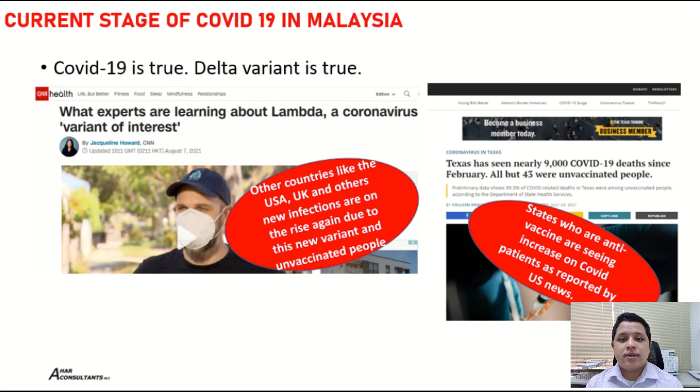As you are aware, COVID-19 is real, the Delta variant is real, and the Lambda variant is coming. In other countries, like the US or the UK, new infections are on the rise due to this new variant. And states who are anti-vaccine are seeing an increase in COVID-19 patients, as reported by US News. Despite the vaccination efforts, we have to live with the virus in the near future.

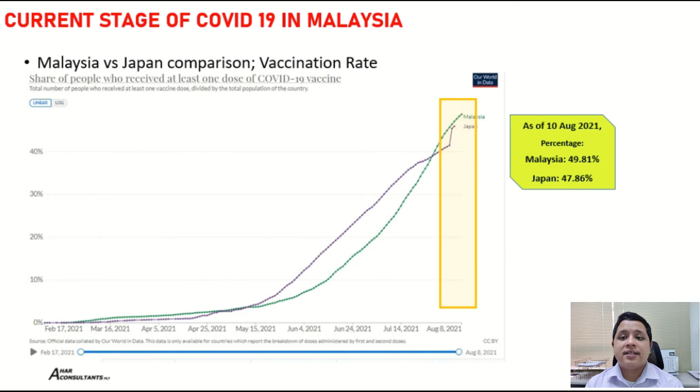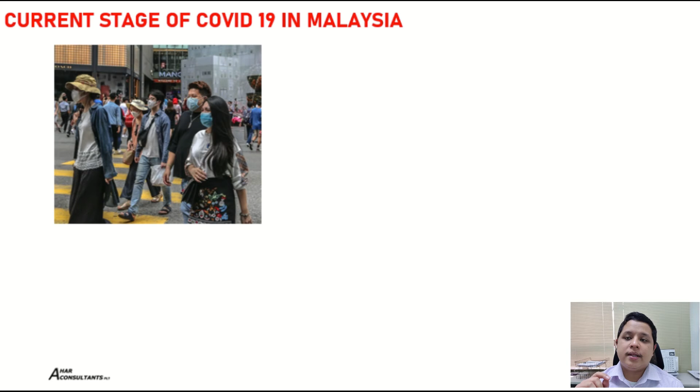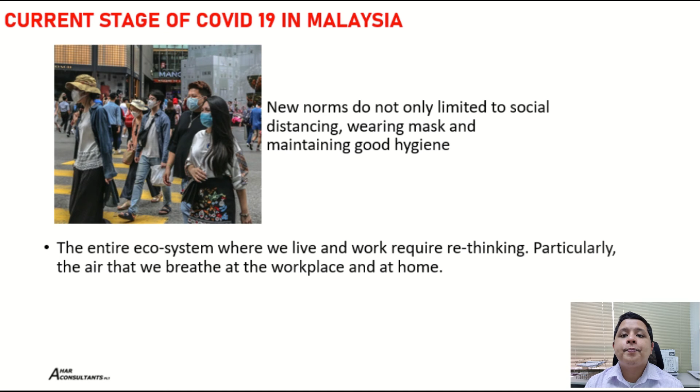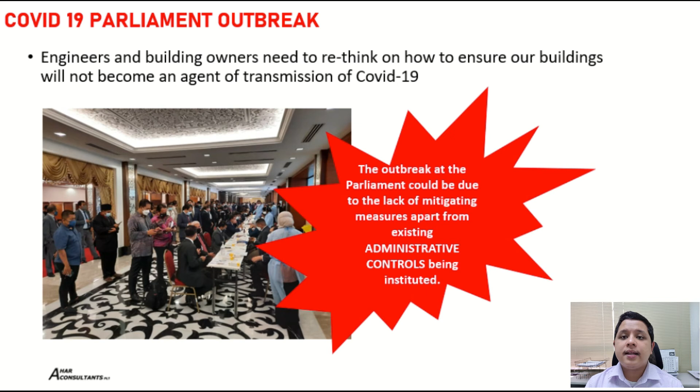New normals are not only limited to social distancing, wearing face masks, and maintaining good hygiene. The entire ecosystem where we live and work requires rethinking, particularly the air that we breathe in the workplace and at home. Engineers and building owners need to rethink how to ensure our buildings will not become an agent of transmission for COVID-19. The outbreak at Parliament could be due to a lack of mitigating measures apart from the existing administrative controls being instituted.

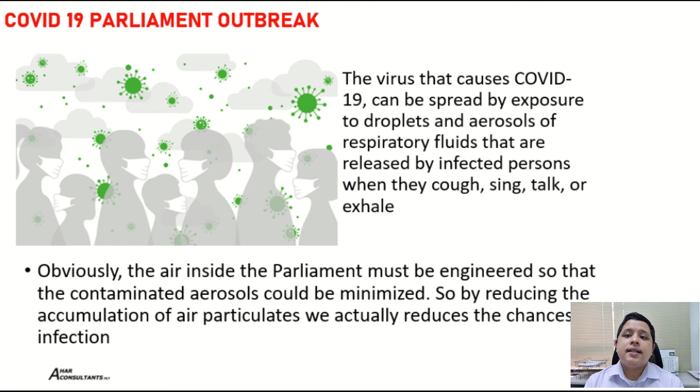The virus that causes COVID-19 can spread by exposure to droplets and aerosols of respiratory fluids that are released by infected persons when they cough, sing, talk, or exhale. Obviously, the air inside Parliament must be engineered so that the contaminated aerosols could be minimized. So by reducing the accumulation of air particulates, we actually reduce the chance of infections.

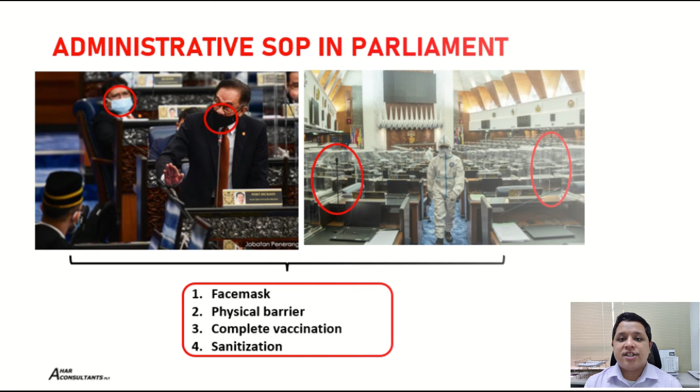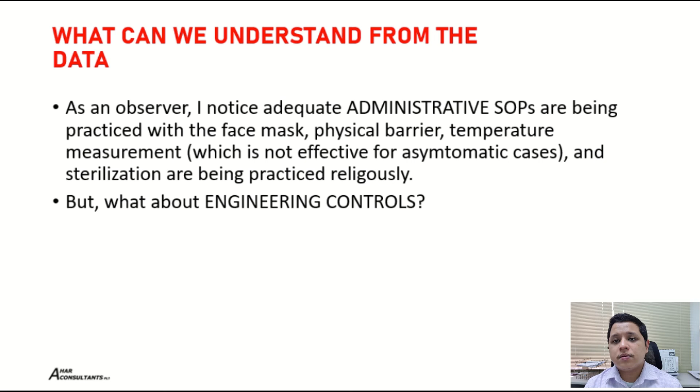Here are some administrative SOPs that I, as an observer, noticed during the parliamentary session. There are practices such as the use of face masks, physical barriers, temperature measurement, which in actual fact is not very effective for asymptomatic cases, by the way, and sterilization being practiced religiously in Parliament. But what about engineering controls? Many studies have shown that these controls can reduce the infection probability. There are 7 main engineering controls that can be initiated.

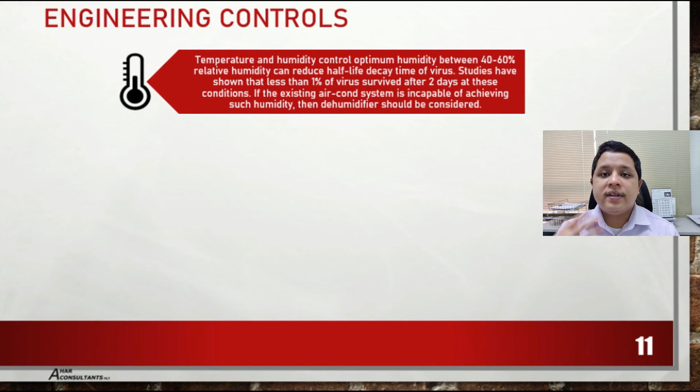The first one is temperature and humidity control. Optimum humidity between 40 and 60% relative humidity can reduce the half-life decay of viruses. Studies have shown that less than 1% of the virus survives after 2 days at these conditions. If the existing air conditioning system is incapable of achieving such humidity, then a dehumidifier should be considered.

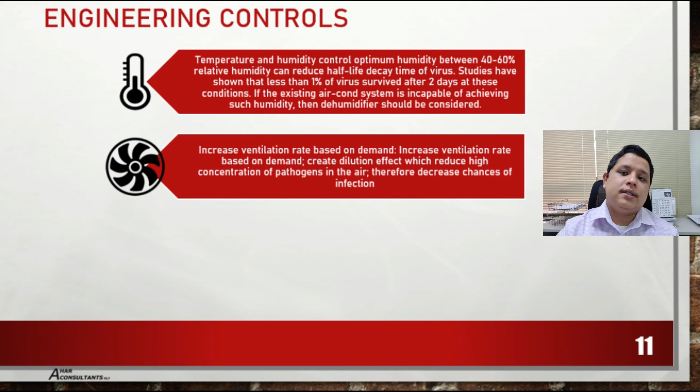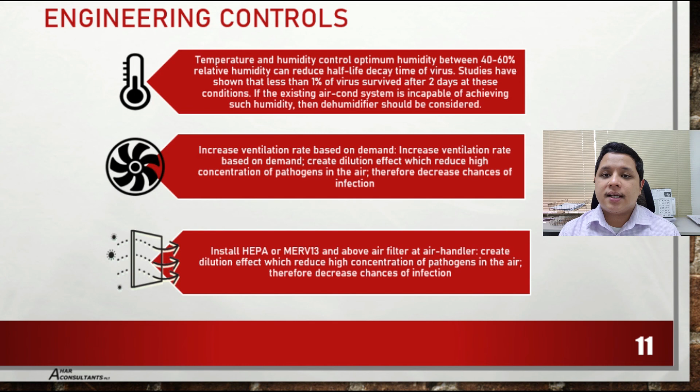Next, increased ventilation rate based on demand. This creates a dilution effect which reduces high concentrations of pathogens in the air, therefore decreasing the chance of infection. Number 3, we have installation of HEPA or MERV 13 air filters at air handlers. This is to eliminate the aerosols from the airstream. The ventilation system can be supplemented with portable high efficiency particulate air cleaners to reduce the number of infectious particles in the air and provide enhanced protection from transmission between persons.

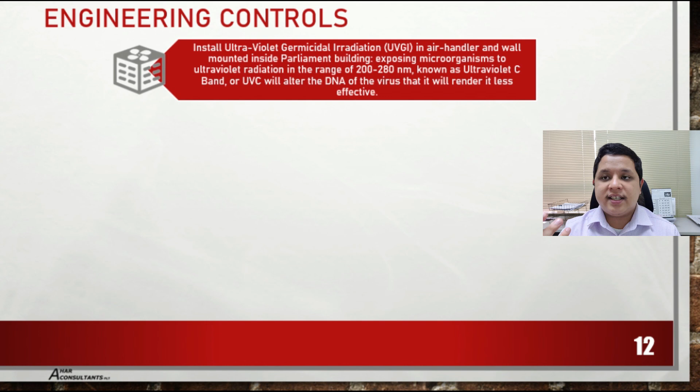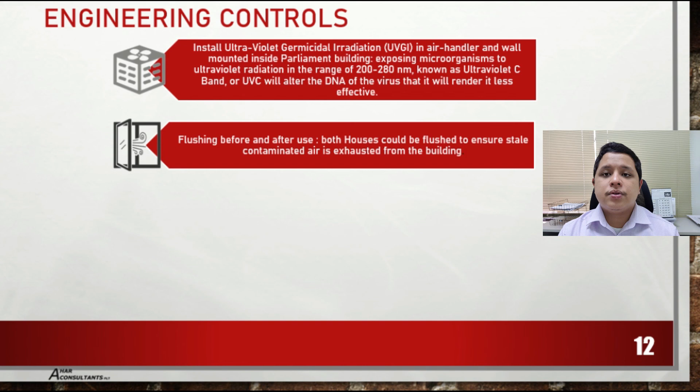Next, we have installation of ultraviolet germicidal irradiation or UVGI light in the air handler or wall mounted inside the Parliament building. Exposing microorganisms to ultraviolet radiation in the range of 200 to 280 nanometers, also known as ultraviolet C-band or UVC light, will alter the DNA of the virus and render it less effective. Next, consider flushing of air before and after use of Parliament. It can be used to ensure that contaminated air is exhausted from the building before and after use.

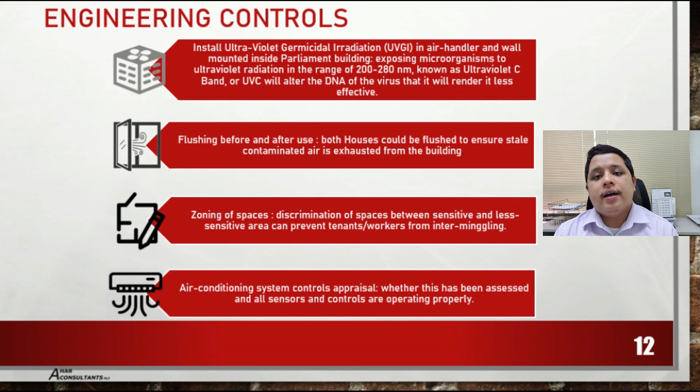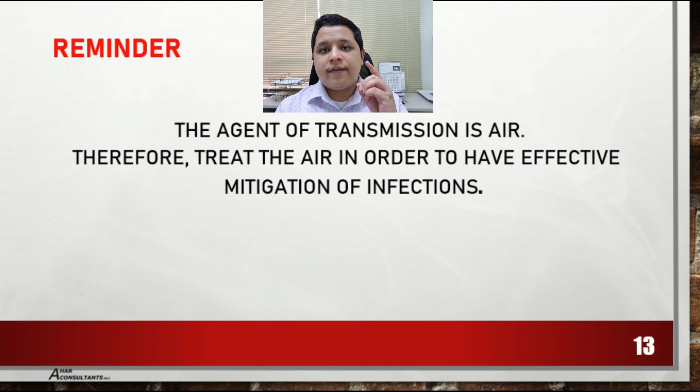Next, we have zoning of spaces. Discrimination of spaces between sensitive and less sensitive areas can prevent tenants or workers from intermingling. And last but not least, air conditioning system controls appraisal. It is to check whether the system has been assessed and all sensors and controls are operating properly. We need to understand the agent of transmission is air. Therefore, treat the air in order to have an effective mitigation of infections.